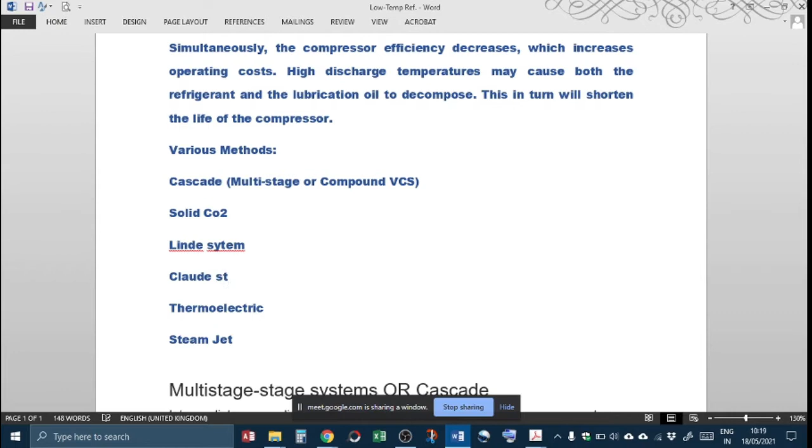Then there's the Linde system and Claude system. The Linde system is a very famous system to liquefy gases like nitrogen, helium and hydrogen. And the Claude system - both these systems are very interesting.

Then there is another method which is also known as the thermoelectric refrigeration system. I have given an overview regarding this system. Thermoelectric refrigeration is based on solid state electronics, a solid state system in which there is no use of refrigerant.

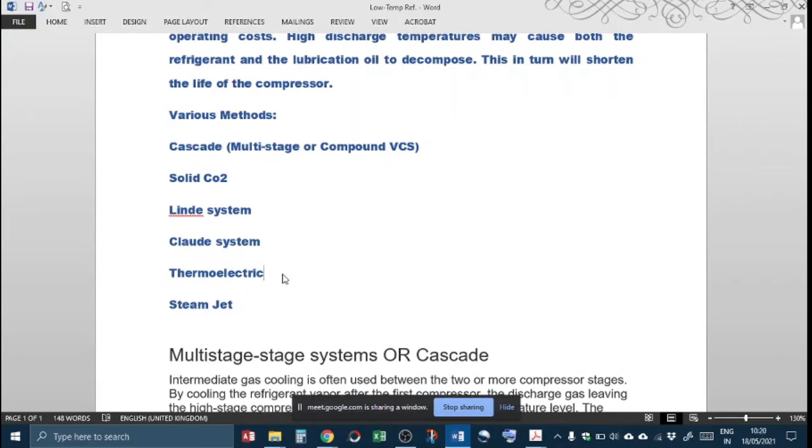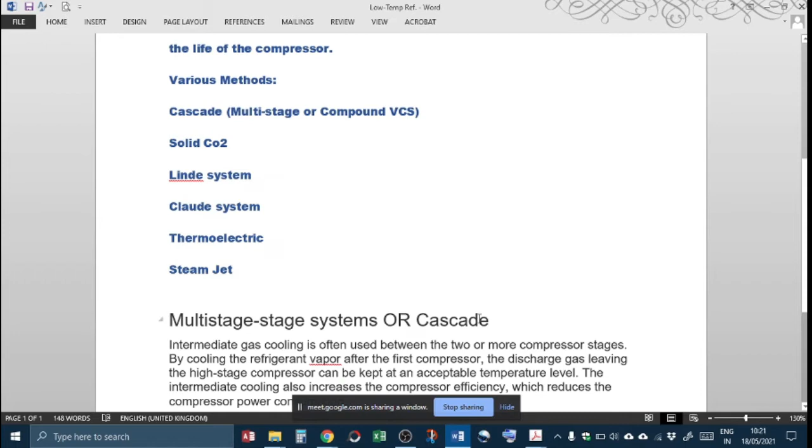And the last one is the steam jet refrigeration system. This is a slightly different concept. In this we use steam at very high pressure, and then by use of that steam and by use of a throttling process, or nozzle and diffuser arrangement, we can maintain or generate a very low temperature space region through this application. So these are the few alternative methods.

So first let us understand why low temperature is required, what is the application of these low temperature systems, and what are the constraints with the existing systems.

If we want to achieve a very low temperature inside the evaporator, then for that we need a very low pressure inside the evaporator. At the same time we also need to increase the condensing pressure. The load on the compressor has been increased many times.

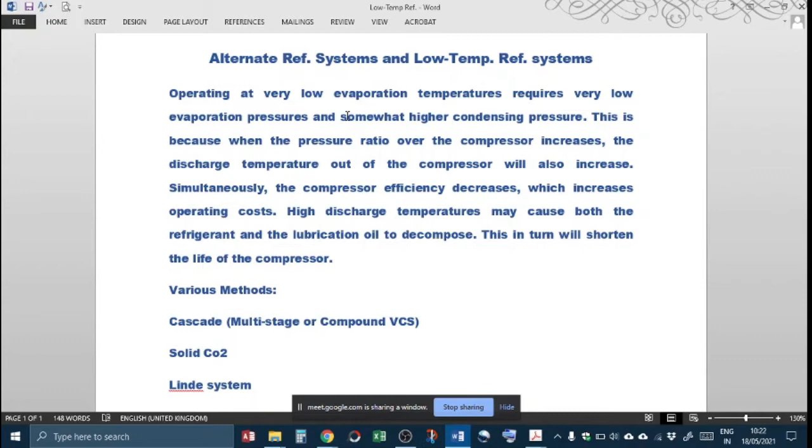Basically, why do we need a low temperature efficient system? As I told you before, there are many different industrial applications, there are many medical applications, there are many commercial applications in which we need to maintain very low temperature. Now in many industrial applications like liquefaction of helium, liquefaction of hydrogen, liquefaction of carbon dioxide and many other gases, all these processes need very low temperature.

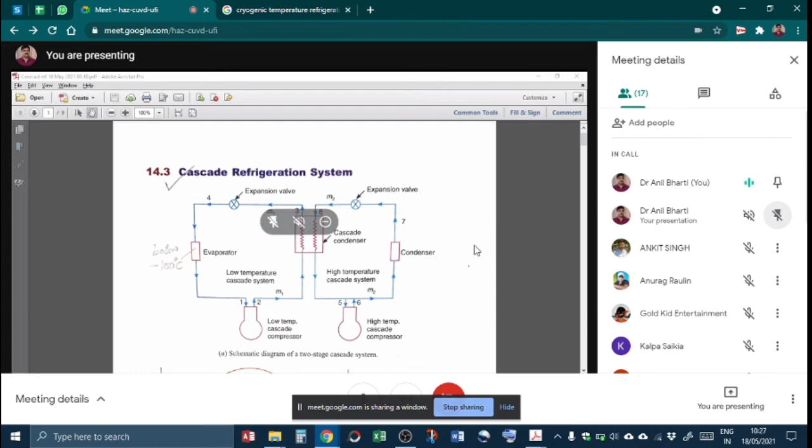So first we look at the cascade refrigeration system. Now how does it work? In this system you can see there are two compressors, a condenser, an evaporator, and two expansion valves. First the low temperature is produced at the compressor, shown by 1 to 2, and the high temperature cascading system is shown by compressor 5 to 6.

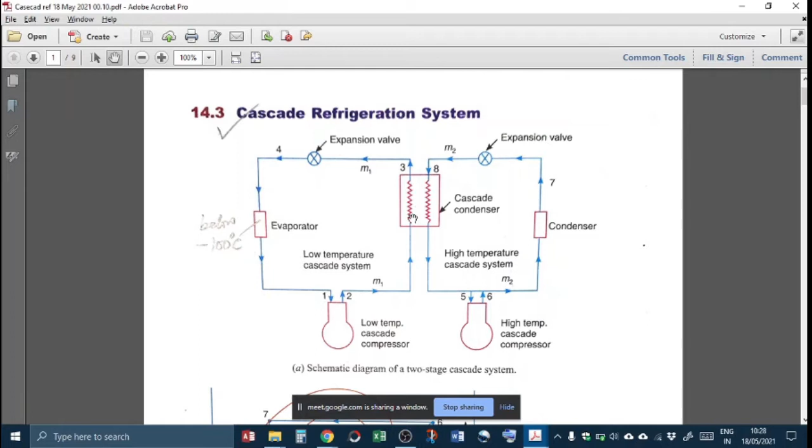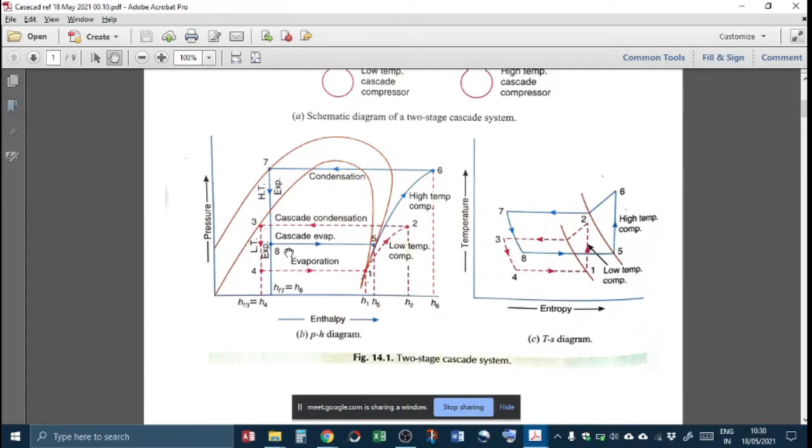Now first what we do is, we produce the low temperature inside this evaporator. This is a sort of evaporator - here, in the first evaporator of the cascade, we generate low temperature from 8 to 5. So we are generating low temperature over here, and then we are compressing the vapors from 5 to 6, then from 6 to 7 we are condensing in the condenser, then we are expanding here.

This refrigeration effect produced is used in the circuit. Here is the circuit: from 1 to 2 it is the compression process, 2 to 3 is cascade condensation.

This is the heat exchanger and this is the evaporator for the first circuit. So what we've done here is, the condenser for the first circuit acts as the evaporator for the second circuit.

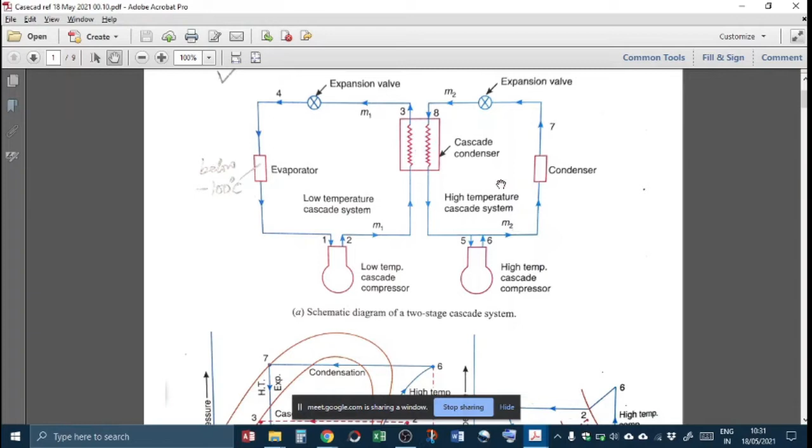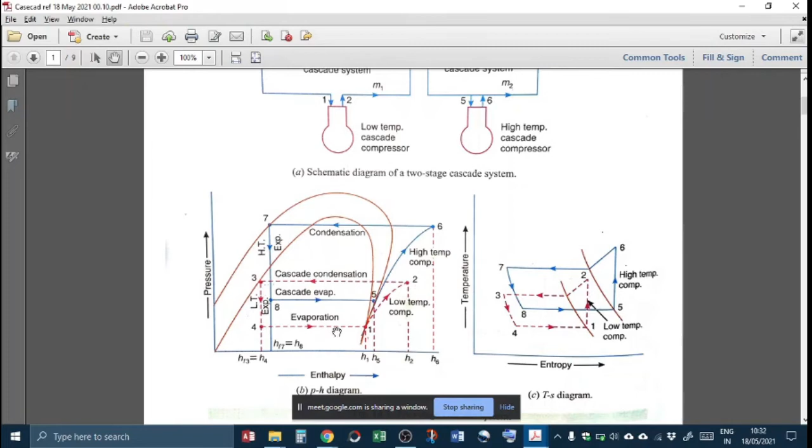So from 2 to 3 it is a condensation process, then 3 to 4 is expansion at a very low temperature, and 4 to 1 is an evaporation process.

So this is the diagram for the cascade system, a temperature-entropy diagram. Here again there are two circuits. We have compressed the refrigerant in the secondary circuit up to the superheated state.

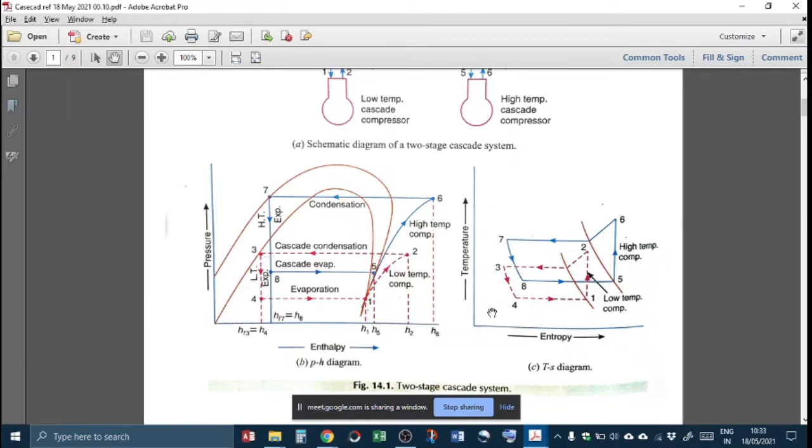So this is the theory of the cascade refrigeration system. Anything you'd like to ask?

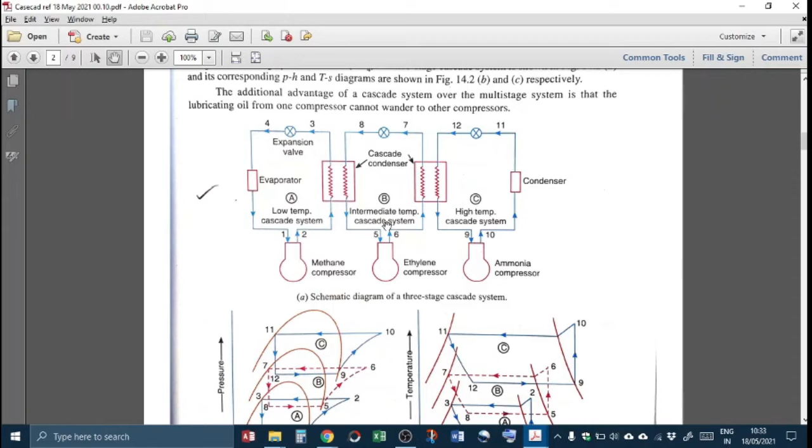Any question? We can add another circuit like in this second case, it will work the same way. Here, this is the last one, this is the final temperature, the ultra low temperature we are getting over from 4 to 1 at point A.

So this is a low temperature cascade system. This consists of 3 circuits.

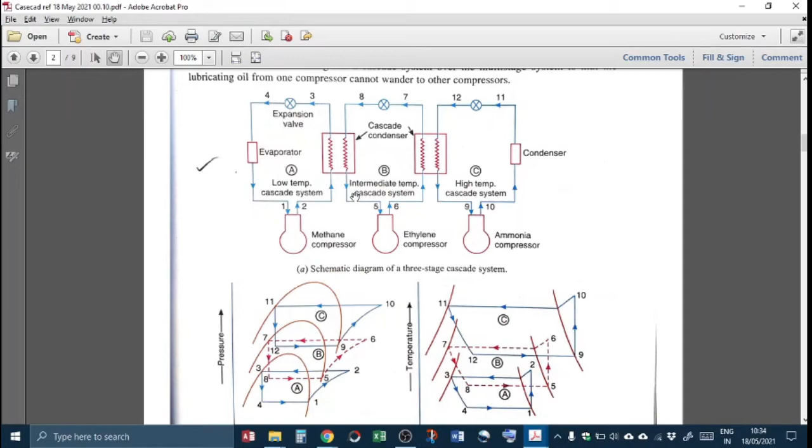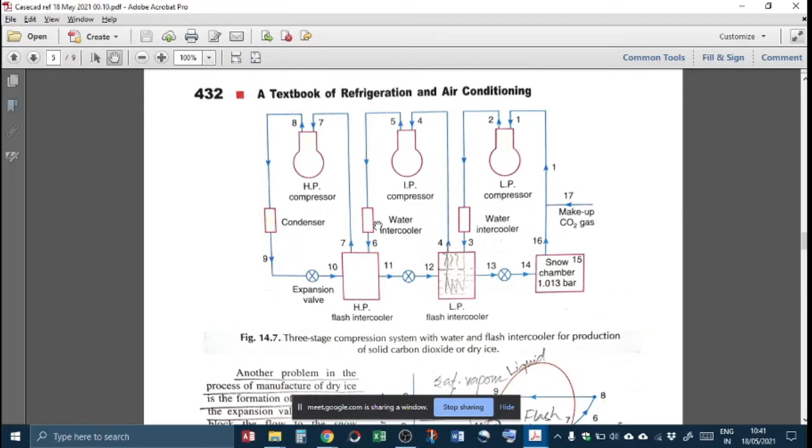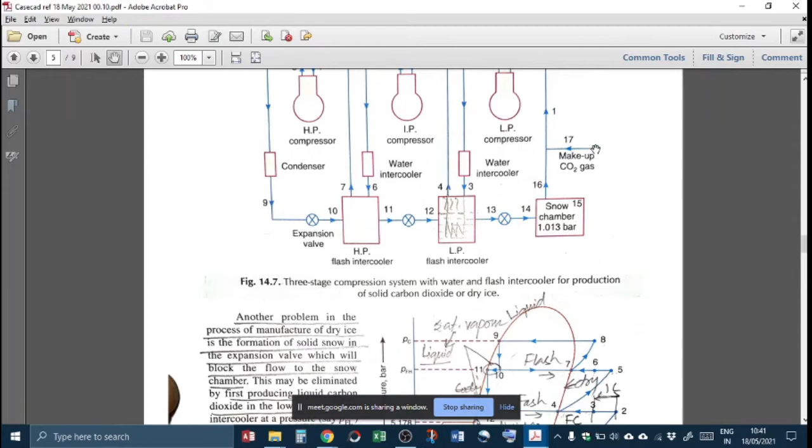So this is the same system. This system is employed just to produce solid carbon dioxide at this end, which is produced here, and the makeup CO2 we continuously add. The cost is around 330 kilowatts per ton of CO2 produced.

Now the liquefaction of air is an important industrial process because it is used for the production of liquid oxygen, nitrogen, hydrogen, helium and many other gases by fractional distillation. It has very wide applications.

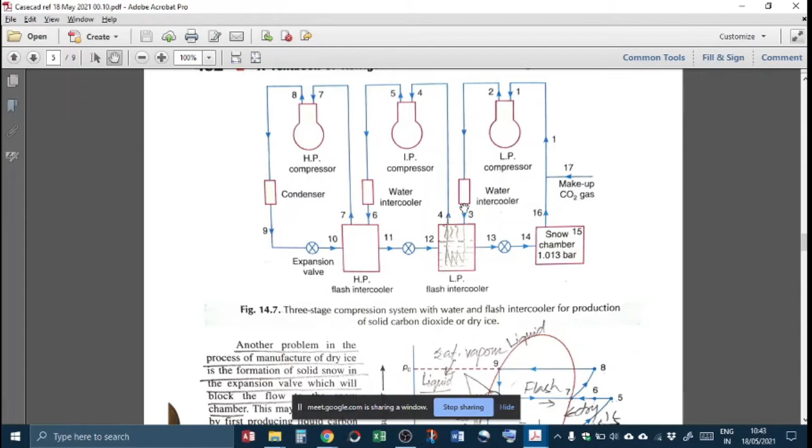So that is why this system is very famous these days. Moreover, it is very economical. It does not require any multi-stage compression system and cascade system, which need a lot of equipment, a lot of big equipment, lot of space, power requirement and maintenance.

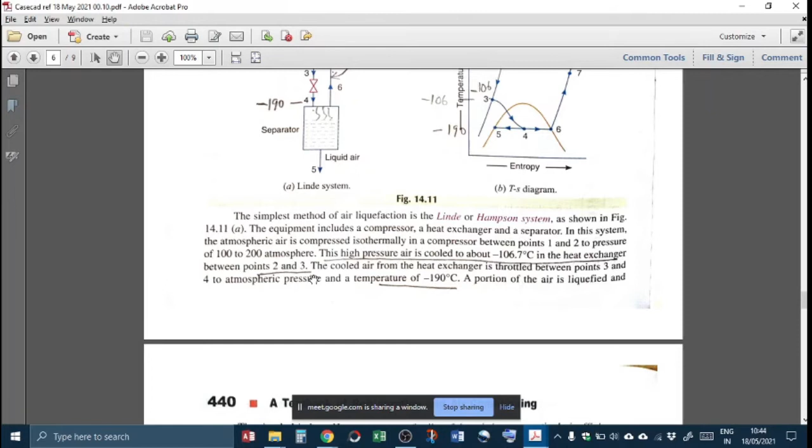This high pressure air is cooled to about minus 106.7 degrees Celsius in a heat exchanger between point 2 to 3. The cooled air from the heat exchanger is throttled between point 3 and 4 to atmospheric pressure, and ultimately we achieve a temperature of minus 190 degrees Celsius.

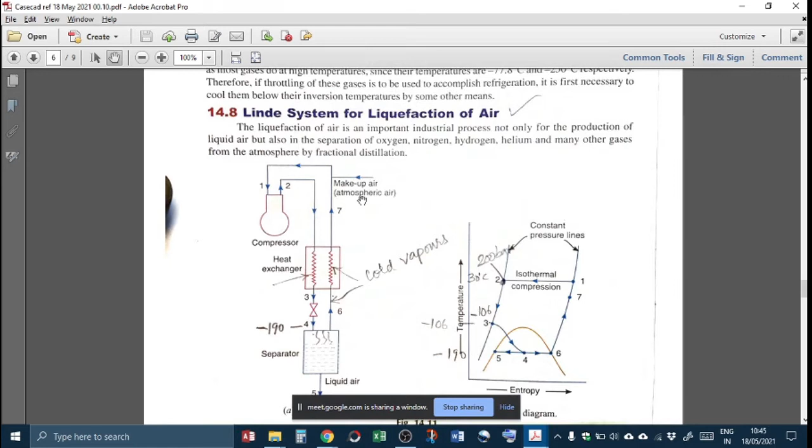I now try to understand how it works. First we take air from here - atmospheric air at atmospheric pressure is taken inside from here.

Then it goes inside the compressor at point 1. It compresses and comes out from point 2, and we have just studied that the final compression pressure is 200 bars. So let us say the discharge pressure is 200 bars. After compression, the air becomes very hot at very high pressure.

It becomes very hot, so we pass it through this heat exchanger. Here at the left side we have hot compressed air at very high temperature. Now let us see what is on the right side - let's complete this fully.

Now this hot compressed air is then expanded through this expansion valve. When it is expanded, its temperature is significantly lowered and reaches up to minus 190 degrees Celsius. At this temperature and that particular pressure, this air is liquefied.

When it is liquefied, some portion of it is converted into vapors. So these vapors have been collected from the top side of this separator. Separators are mostly centrifugal, based on centrifugal action, so it separates the vapors or flash from the liquefied air.

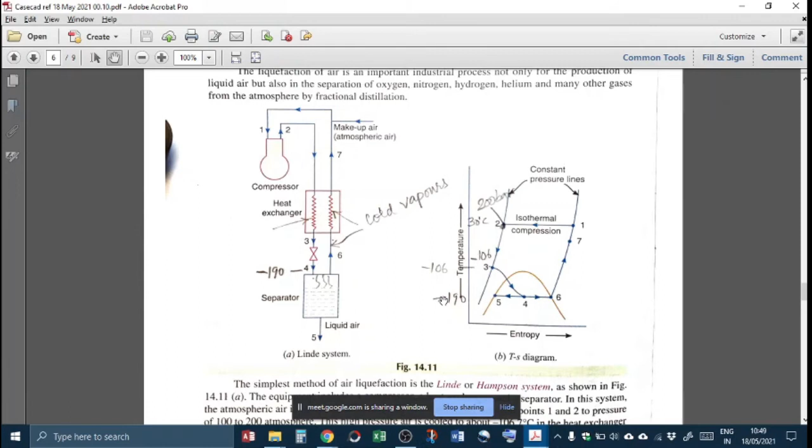From 4 to 5, this is constant temperature because it is liquefied at a constant temperature, and we removed this liquid from the bottom side of the separator at minus 190 degrees Celsius. So this is the simple working of the Linde system.

Again, 4 to 6 - here we are collecting the vapors, which are generated at the same temperature, minus 190 degree Celsius. From 4 to 6 we are touching the dry saturated line. This is the dry saturated line for air, and this is the liquid saturated line. Point 5 lies on the liquid line, point 6 lies on the dry saturated line.

So 6 to 7 is where these cooled vapors at minus 190 degrees Celsius are absorbing the heat of the compressed air, so they are heated up to point 7.

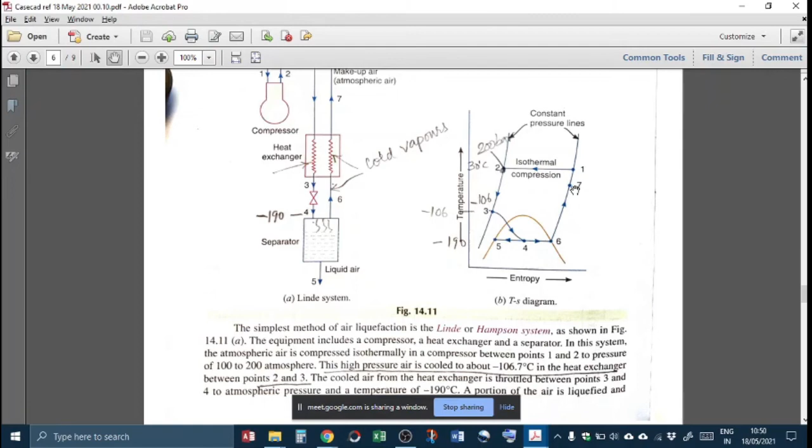Then 7 to 1 shows that some surrounding heat is absorbed by this. So from here, then from 1 to 2, it is compressed again.

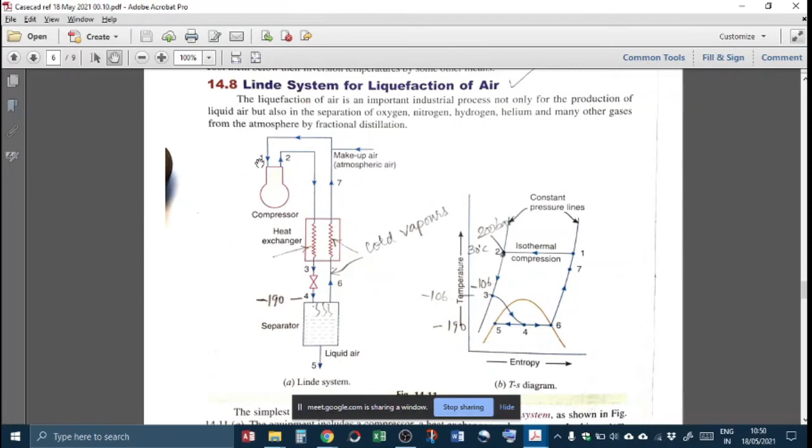So this is a simple temperature entropy diagram for Linde system. Now this is the modified version of this system. Let us see what is happening here. Here the air is intake. Let us say air is coming at atmospheric pressure and temperature is 30 degree Celsius.

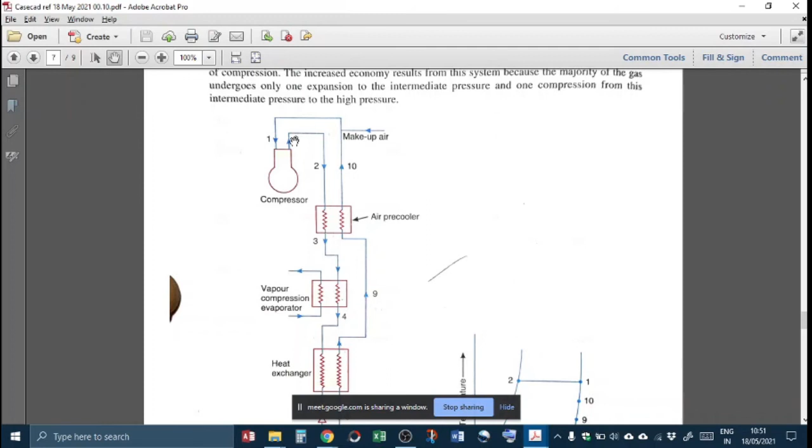At 30 degrees we do isothermal compression. Isothermal means we keep the temperature constant while compression. So at point 2 the pressure becomes 200 bar, temperature remains 30 degree Celsius. From 2 to 3 we remove the heat from that compressed air. Then we are passing this somewhat cooled, compressed air through this heat exchanger.

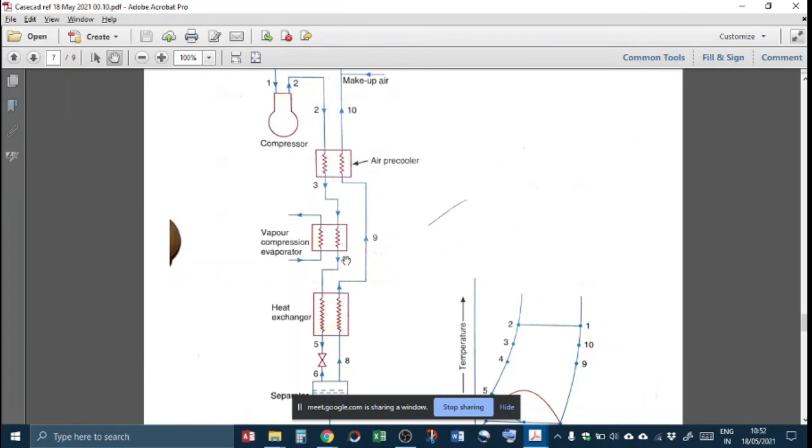So again we cool the compressed air up to point 4 by use of this additional heat exchanger, additional vapor compression evaporator. Then again we pass this cooled compressed air from this third heat exchanger.

The third one is the same, where compressed air is coming from one side, and from the other side the vapors which are coming out at minus 190 degrees Celsius are cooling this compressed air.

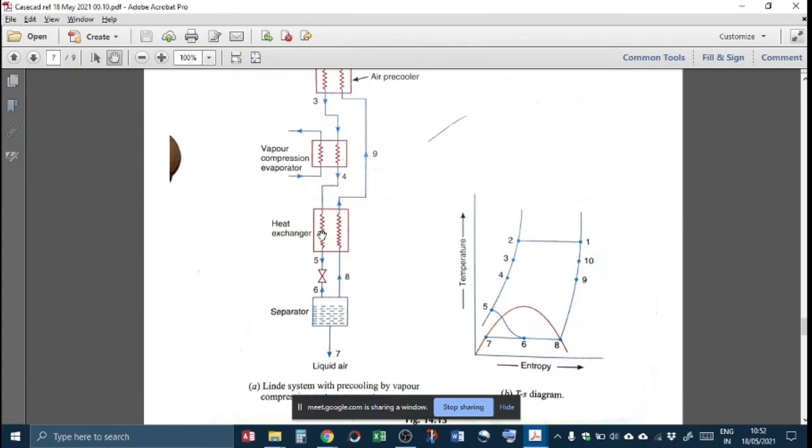So these vapors first take away heat at this end, then they become somewhat hot, but still not as hot as the compressed air temperature. So they are again passed to the second heat exchanger which we saw first. Here they again take up the heat of this compressed air which is at a quite high temperature.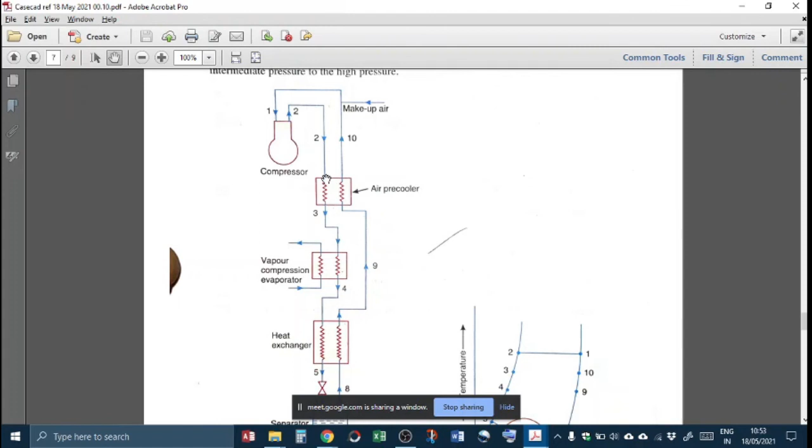So we break down this process into two subsystems. This way the efficiency can increase. So this is the advanced version of the system. This is the same diagram with some modifications.

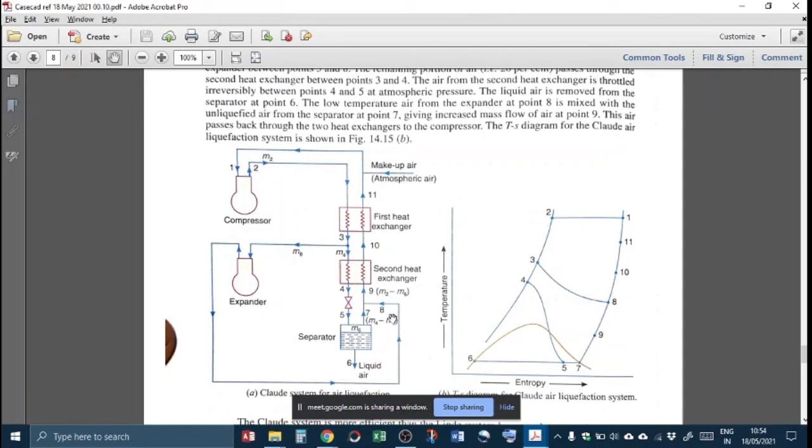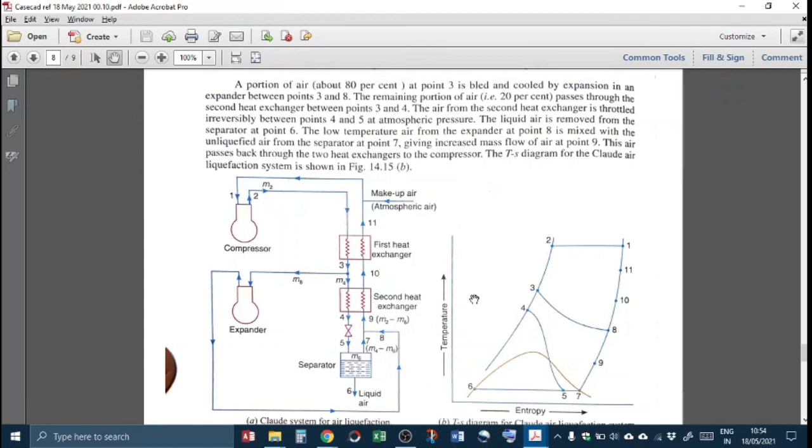From tomorrow onwards we will start psychrometric process. Any question? Any question?